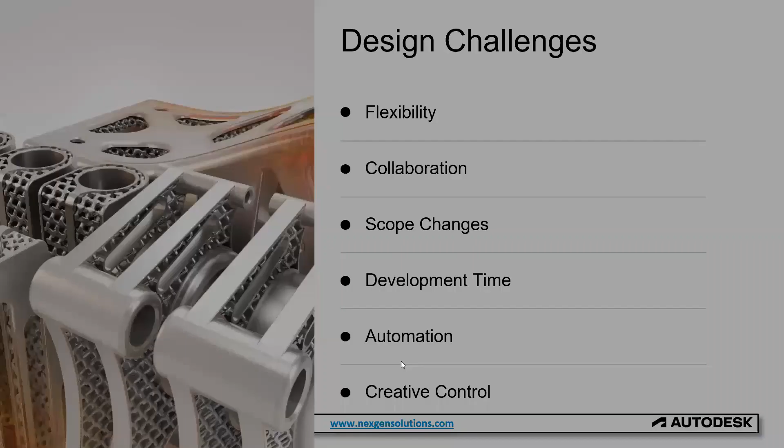So I'll share my screen quickly here. The topic today is advanced assembly, and that's actually a pretty wide range of topics. I think we're going to do sort of a series of these, and what I'd like to focus on today is the top-down design methodology. If you're not familiar with that, top-down or bottom-up are two methods of approaching a product design.

My background's in mechanical engineering, and I've been doing this for 20-some years, working with not just Autodesk software but a variety of other CAD tools as well. What I've found is that it's usually a hybrid, a little bit of both. You don't always get a chance to start with a clean slate, but when you do, it's pretty cool because you can use a little more of your imagination and think outside the box.

Top-down design is where that comes into play a little bit more. Top-down means we're starting with a clean slate. We're going to think about what components we might want in our design and typically use a skeleton as the foundation for that within your assembly. We store a lot of our information and the framework for our design in that skeleton, and then propagate that information down to the components underneath it. So it's really a high level to start.

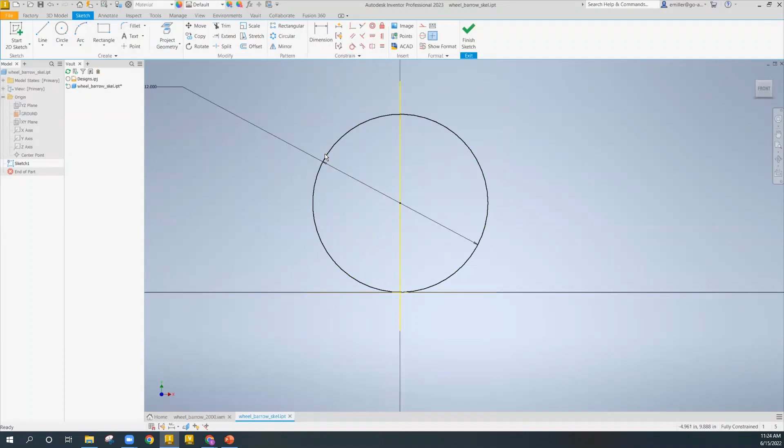I probably should have projected also a vertical plane. There we go. And then we'll line up that middle point with that one. And now once it turns black, if you used Inventor, you know that now it's fully defined. And that's really what you want to do in your sketches. Definitely a best practice. Don't leave things purple, blue, whatever. Try to get it locked in, especially if you know what your design intent is. So we're going to hit OK there. Okay, so that's just an initial part of our sketch.

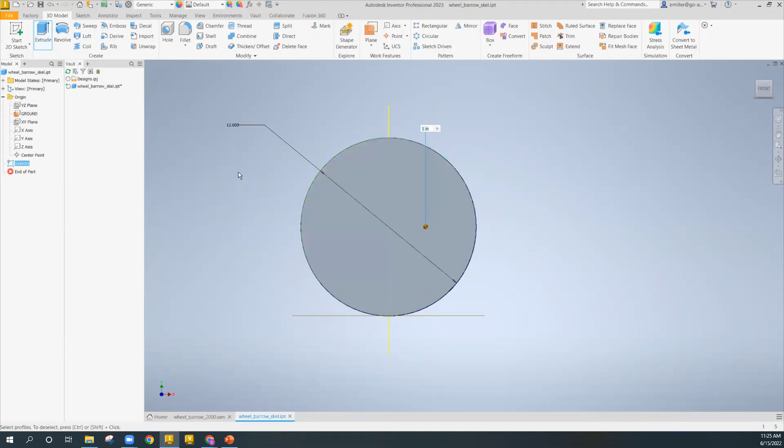And I know I'm not going to have a ton of time here, but basically we could even add a surface to this if you'd like to see this built out into something more physical to see what it looks like. I don't like, again, putting solid geometry in my skeleton. So as I'm building, there's a little option up on top here just to turn surface mode on. Okay, so now surfaces are basically zero thickness.

And when you get into surfacing, we touch on that more in the advanced part class, where you can manipulate surfaces, patch them together. You can really create some unique shapes. So in the automotive industry and some of those other higher-end areas where aesthetics are really important, that's where surfacing comes in, and eventually maybe you thicken it or shell things out to be able to get nice smooth shapes, but still be able to manufacture them.

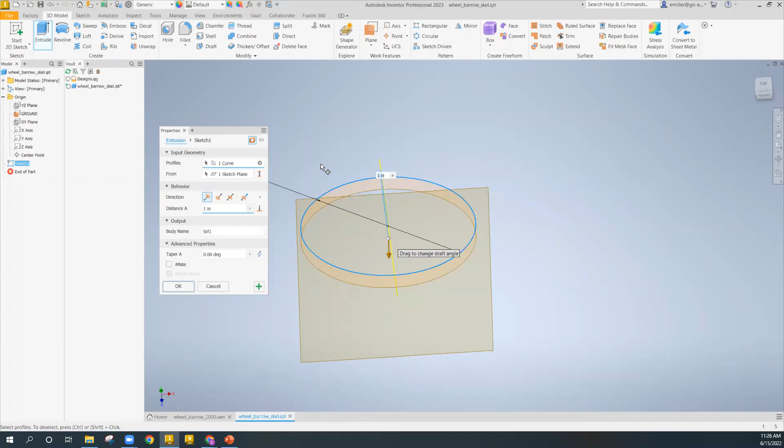So again, if you're interested in stuff like that, we'll talk more about that in a later webinar, but I'm just going to make this one, oops, let's see. I grabbed a different surface there. Let's see, profiles.

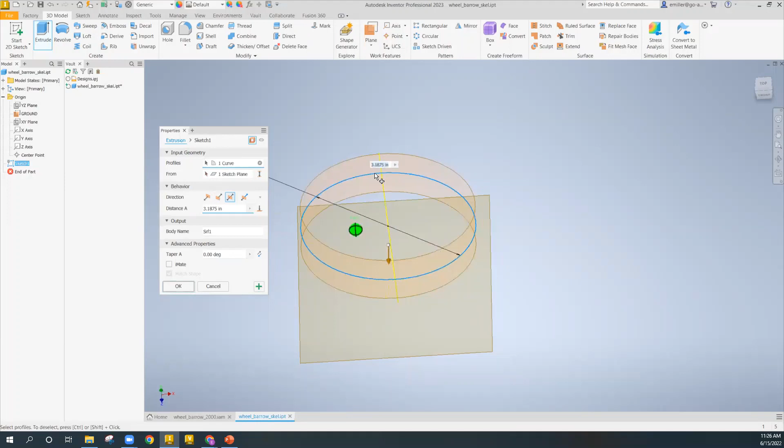Let's cancel that one out there. I'll grab this one. Okay, equidistance. Then let's say this, maybe it's 5 inches. Okay, so then we can kind of see what our wheel is looking like, even though, you know, it's not necessarily in our model yet. Let's just do maybe another quick one in here.

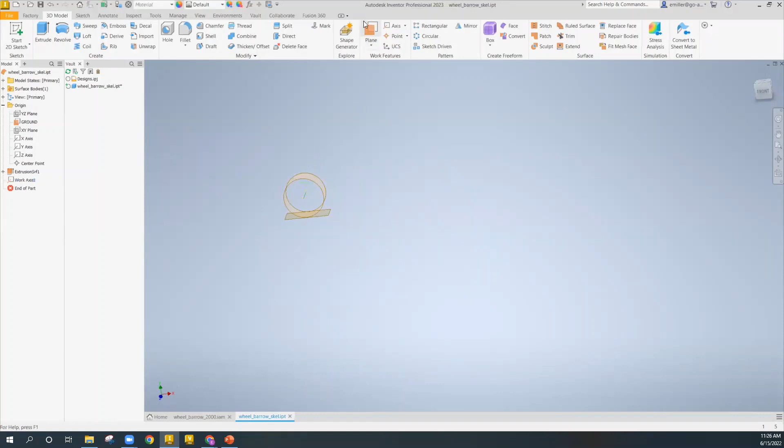And again, in the skeleton, we like to add a lot of these work features. So maybe I want to put in an axis through that wheel or through that surface. There's our axis through the wheel. And now I maybe want to add a plane from where my handles are going to go. So let's start a plane here. We'll go through that one. I'm going to hold control and pick this bottom one. Now we've got sort of an angle here. We can put this one maybe at like 35 degrees and use this for creating my handles.

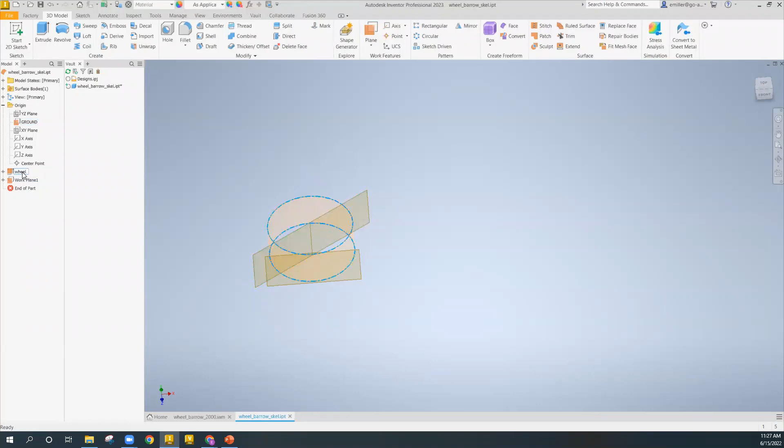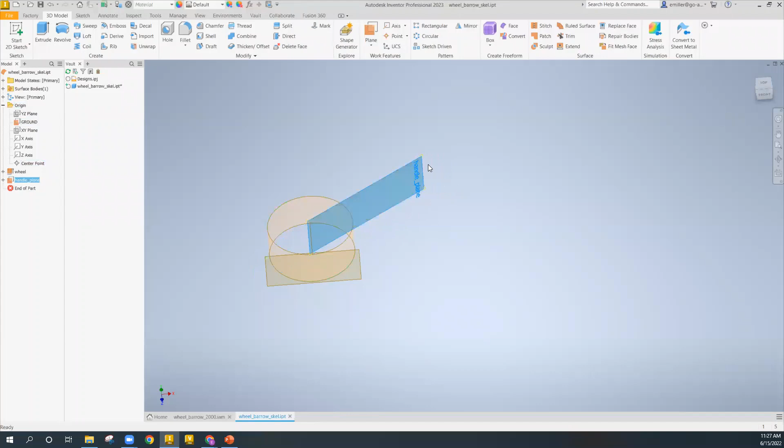Let's hit OK there. And again, it's always good to rename these things so you know what they're used for, instead of just extrusion one. We can call this one wheel. Work plane one, let's call that one handle plane. So try to take advantage of that, so it builds a little bit more intelligence into it. So the next time either you open it a year down the road or somebody else does, you're not just shooting in the dark as far as what each of these are really for.

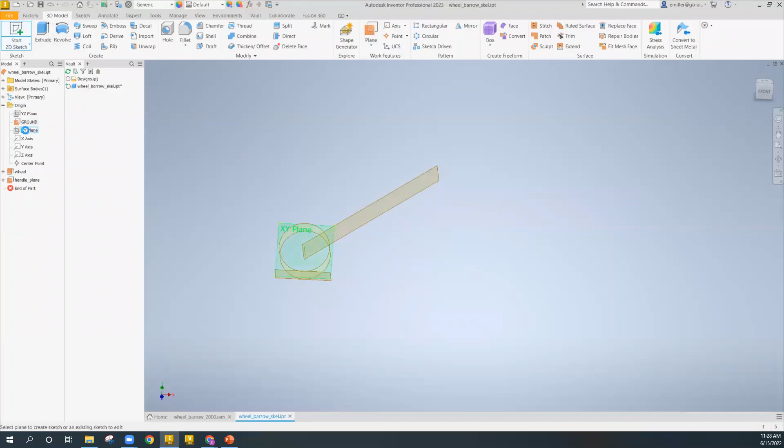And if you touch on these here, you can drag the corners and just drag these planes up, so it takes the shape of your part. But now I can see, okay, my handle, I'm expecting that to go up to the right. All right. Let's add one more sketch, and we'll put that again on XY plane. Let's project some geometry first. Project the wheel and the handle plane, and then we can start building what our wheelbarrow is going to look like. So snap it to that. Come over here. Come down like that.

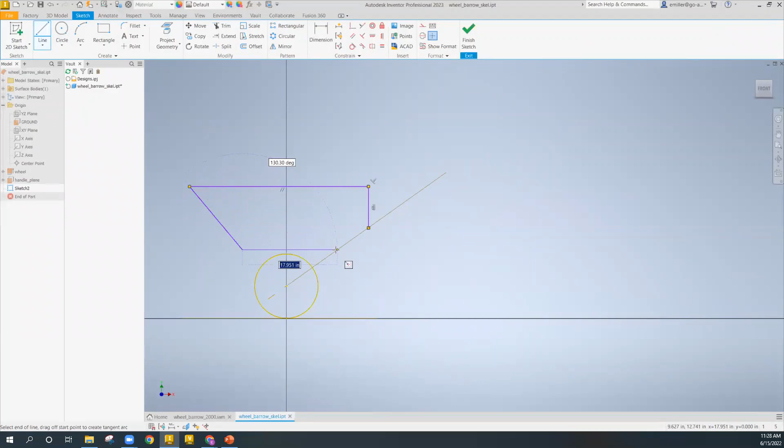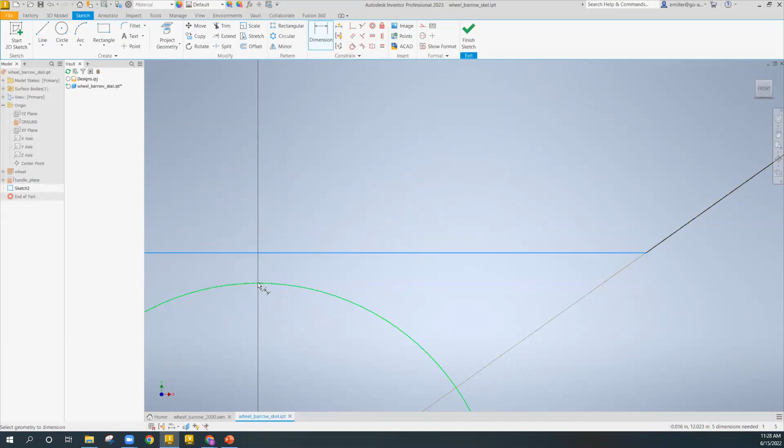And then maybe I'll just connect these two. And so where this can help now is, for my skeleton, I can make these two... Oh yeah, that's right. If you've ever done dimensions to a tangent point, you can see the glyph changes there a little bit. You've got to hover over that spot, wait till the glyph changes, and then I can create my dimension between the two. Let's say we need that to be 1 inch. And so as my wheel diameter changes, this is always going to make the bucket at the right spot. It's always going to be 1 inch away from the wheel.

We can add a couple of other ones in here. Let's put this at a specific angle here, 35. And then maybe overall height from the base plane there. Let's say we want this to be 26 high. And let's go from maybe the center here out to this one. Let's make that one 15. Okay, so now we can see it's fully locked in.

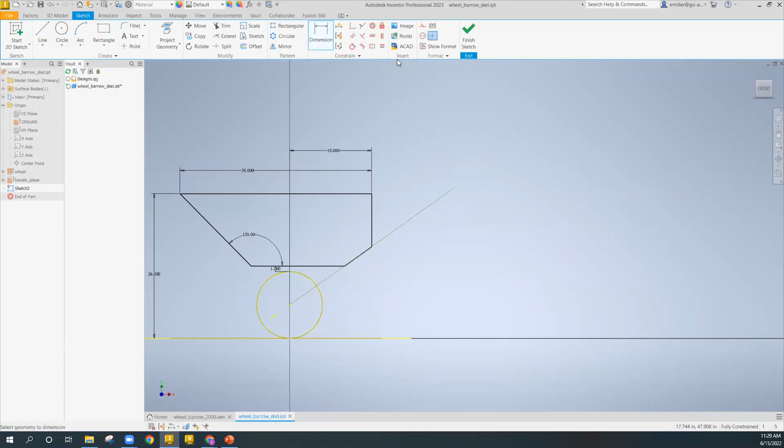Obviously, we're worried about maybe center of gravity over the top of our wheel, things like that. We can finish out our design eventually, but just to have that available now, we can even use some planes or even create a surface with this one potentially. So if I go extrude, grab that profile, and see now it's got surface selected. Okay, so let's just drag that out a certain depth.

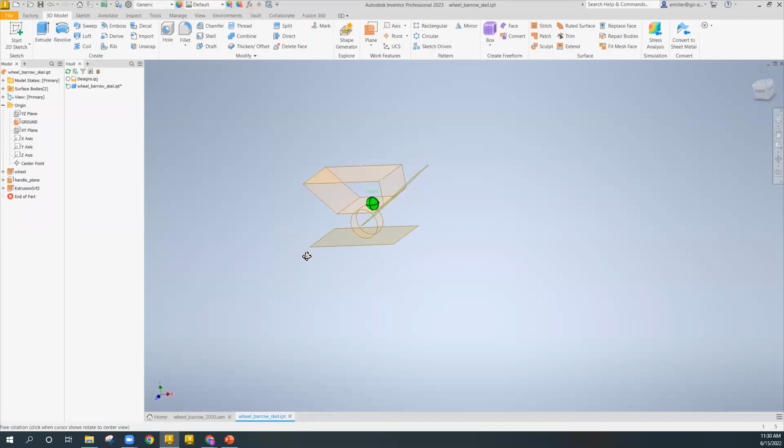And hit OK there. So you can really see, it's like we're seeing the wheelbarrow barrel. The vision we have for it is already right here, even though we haven't really put any geometry yet into our parts. So the way we do that, that's the next step, is once we get this finished out the way we want, this is like our puppet master high level. We're going to drive the design from the skeleton.

But now I go back to my assembly here, and we've got the bucket, the handle plane, and the wheel. So just to kind of show quickly, now what I want to do is activate the wheel, right in context here within my assembly, and I can utilize some of this geometry and just reference it so that it drives my wheel creation.

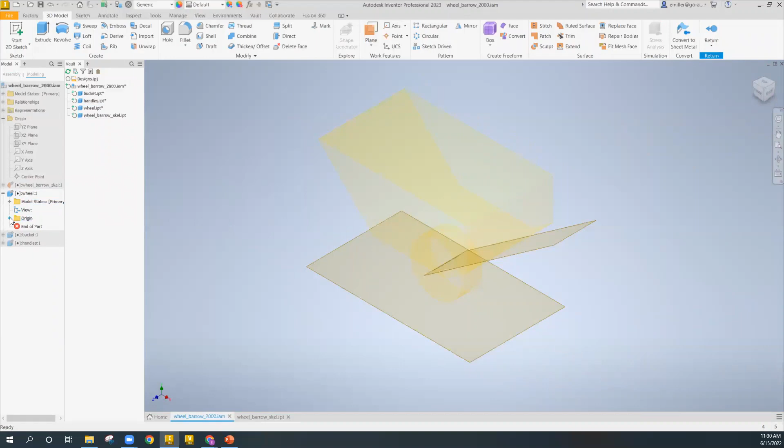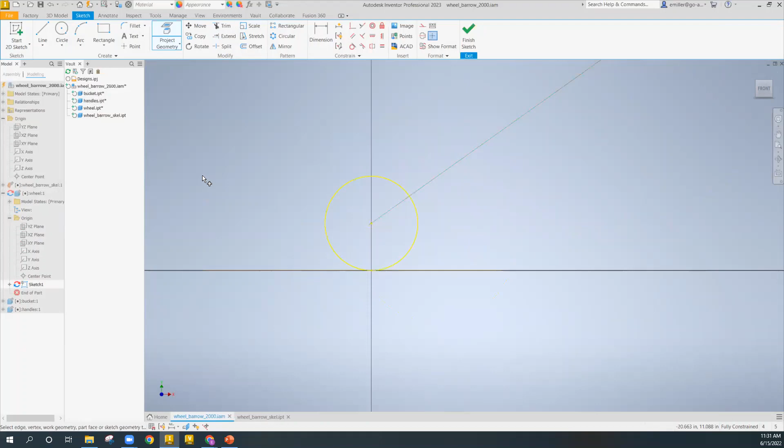Okay, so let's sketch on. We'll start a sketch here, and you can see that's kind of pretty small down here, but eventually it'll take the shape of our design. So we want to sketch on that XY plane too. There's my plane. It's kind of hard to see since we're looking at it at this angle, but let's project some geometry here. And there's the wheel.

Okay, so that's really all I need to project in order to create the wheel in the part anyway. So let's hit there. We're going to extrude that. Again, let's go maybe a distance of 5, both directions. Hit OK. And one of the key things is, typically, I don't know, my materials are not showing up in there. I wonder if that's okay. But let's maybe just add a couple fillets here to make this look like a little bit better wheel. Maybe 1.5, something like that.

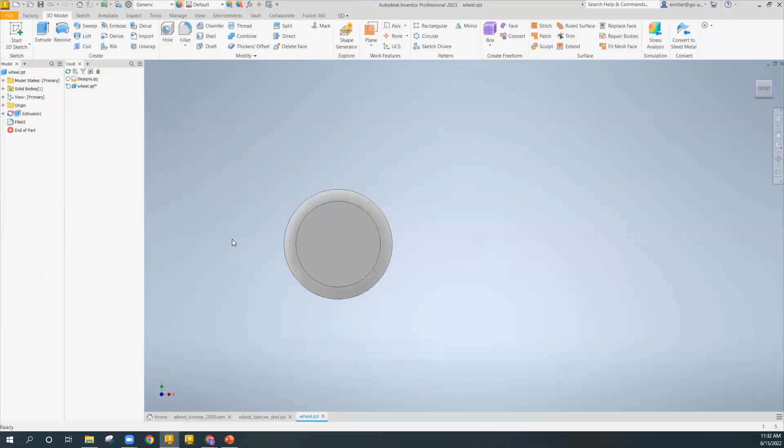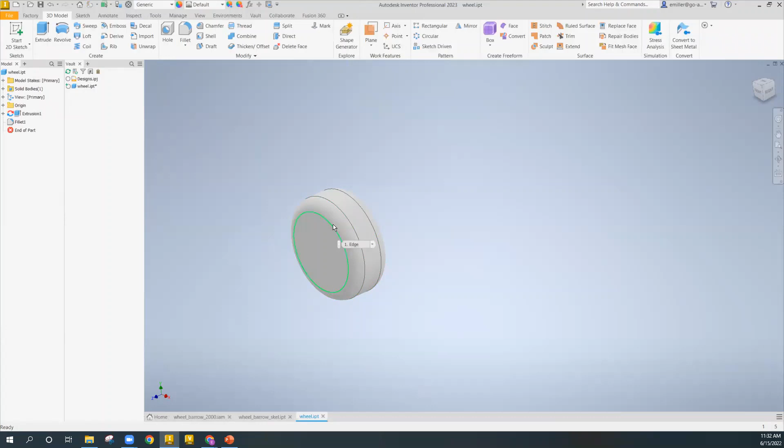And now if I open up the wheel on its own, and we see the geometry here, and see, must have an issue here with my material library. I did just switch some things around in my project file, so it's not pointing to that. But obviously we want to make sure we apply the right material. So I was just going to apply rubber to this wheel. We maybe put a hole through it. However, we're going to connect in with our handles, things like that. But you can see how the design can get started.

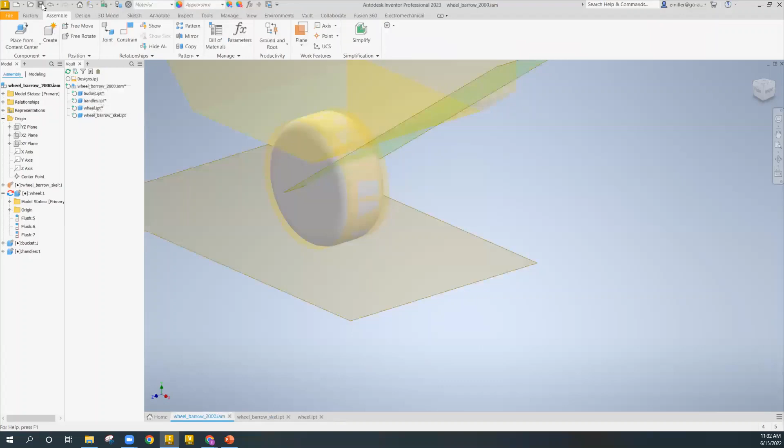And notice here now, this is our adaptive icon that shows up next to this extrusion, meaning that it's referencing something outside of itself. So there's an external reference out to our skeleton, and again we go back to the main assembly here, and then just hit save on that. Make sure everything's saved here.

And again, it shows the adaptive icon there. If you ever want to break those, it's a little bit of a temporary break because you can always turn it back on. But if I uncheck the adaptive, then it's not going to be driven, at least for the time being, by the skeleton anymore. So that's one way to kind of break that link.

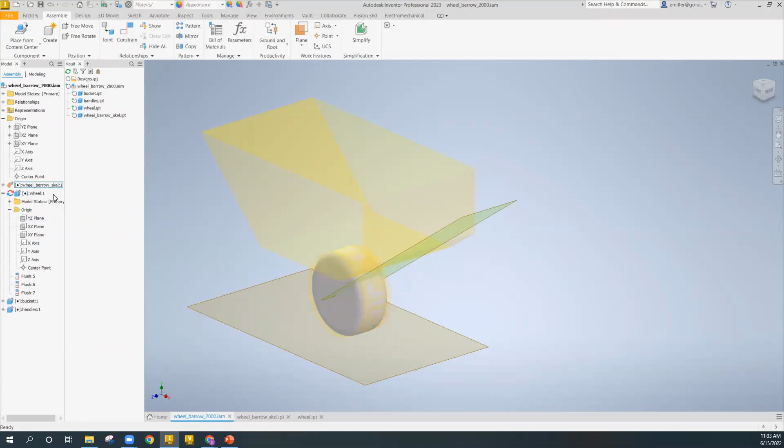If you really wanted to break it, you would probably go in, you'd have to go into the sketch that created the wheel, remove that projected constraint from that previous skeleton sketch, and then just give it a regular diameter and lock it in with respect to the datum planes, right within the wheel part. But throughout the conceptual side of this, it's nice to have that adaptive external reference going back to the skeleton, because they all are going to move based on any dimension changes I make in the skeleton.

So probably not anything too groundbreaking there. If you've worked in assemblies in Inventor quite a bit, you maybe used a little bit of this already. But I think it's a good concept, the top-down design concept. If you get a chance to utilize that, try to take advantage of a skeleton, use it to help propagate information down to your piece parts.

Okay, well, let's take a look here. If there are any questions, I'm going to bounce back to the screen. Not seeing anything in the Q&A dialog box.